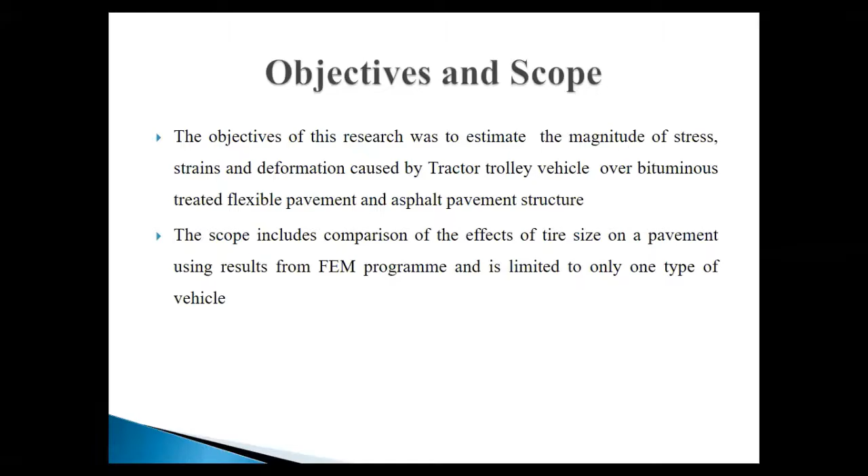For example, I'm moving on to the next slide. This is an introduction, you are looking at this as introduction. For example, I want to come back on it - where do I want to come back? I want to come back on the picture. I don't want to show you the slideshow right now. What do I want to show you here? I want to change it.

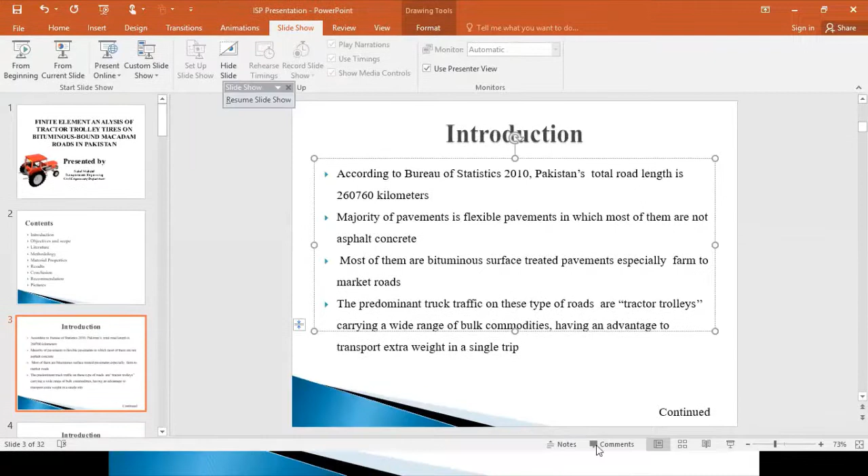I'll show you how you can make it in the paragraph form. For example, I am showing you here that this is in paragraph format, but it is not completely in paragraph form - these are in bullet format. You should not write any introduction in paragraph form, because people will get bored from your presentation. You should write down the important points in the form of bullets. You can see this blue triangle - these are known as bullets.

You should show all the points in bullet format, not in paragraph format, especially the important points - not all the points of your introduction. You should write it down in this slide, otherwise people will get bored from your presentation. You don't want to make them bored, so you should make their interest more. How can you make their interest? By making it into the bullet form.

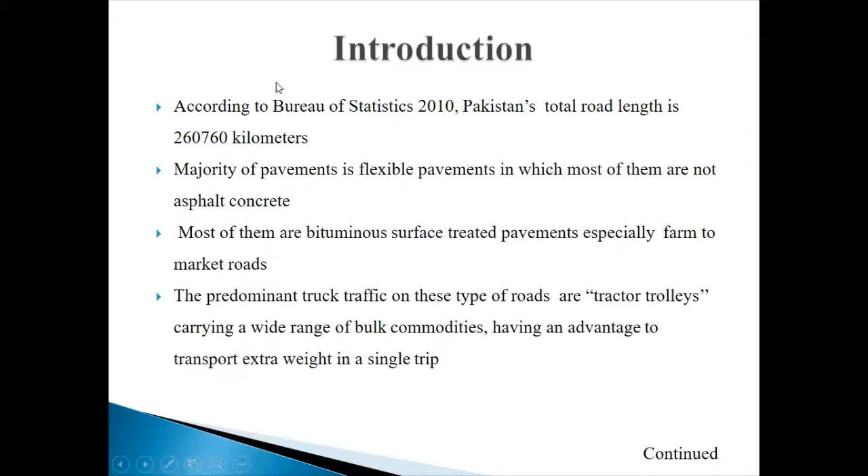You can make your introduction like that. For example, look here, there is an introduction given to you, and I want to make it evenly distributed. It is not evenly distributed, so how can I make it evenly distributed? I have to go into the Home tab, and I will make it evenly distributed.

Always keep it in mind, when you are writing an introduction, you should not write it in paragraph format, because it will make the audience bored and they will not take interest in listening to you. You should write particular important points which are relevant to your introduction and very important to discuss in the presentation. Write down only the main important points, and then you can describe those points clearly when you are speaking.

Keep it in mind, you should not write down anything in paragraph form. You should write in tabular form, in bullet form, so it will take the audience's interest. We have already discussed table of contents, and now I am on the introduction side. So what you have to do is write it down in bullet form.

How can you change the type or design of your bullet? You can go here in the Home tab, and you are looking at this - this is the bullet format. You can take this bullet form, or this one, or this one, and look, it is changing.

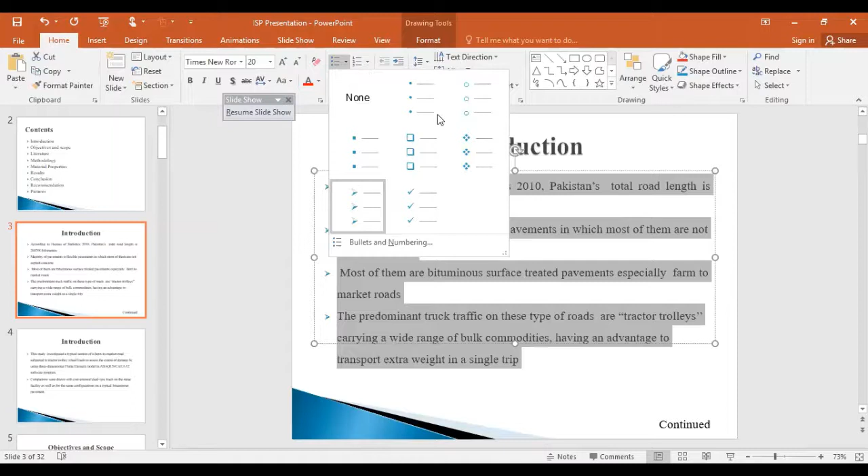You can also go for numbering as well, but I think numbering doesn't sound good, so we should go for bullets. How can you create the bullets? You should select this one - I think this will look far better than anything.

You can write down a full stop at the end of every point, so when you finish it, that's how you end it. What you have to do is select the whole points and make it evenly distributed - look, it will look nice. You can do it like this.

For example, I am moving towards another slide, and you can see the introduction is in points. So two bullets were left, so what I have to do is move on to the next slide.

But before moving to the next slide - we were on the same topic, that is introduction - what you have to do is write down 'continued' here, and you can also write down 'continued with the introduction' as well, or write down 'continued' on the next slide.

This will help the audience understand that you are continuing your previous slide. So what you have to do is write down the introduction here again, and you can write down 'continued' here. If you don't want to write 'continue with the introduction', you should just write down 'continue' here.

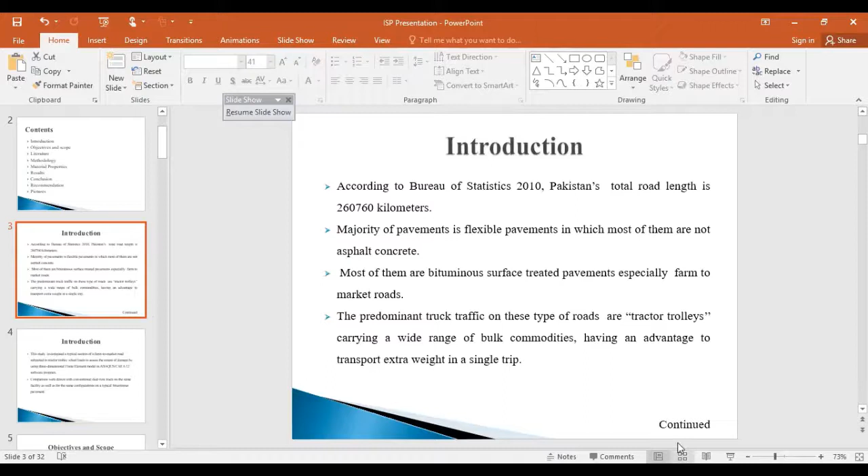So what you have to do is move on to the next slide. I am watching and I notice that the paragraph or bullet points are not evenly distributed, so distribute your text evenly between the margins. You have to do it like this.

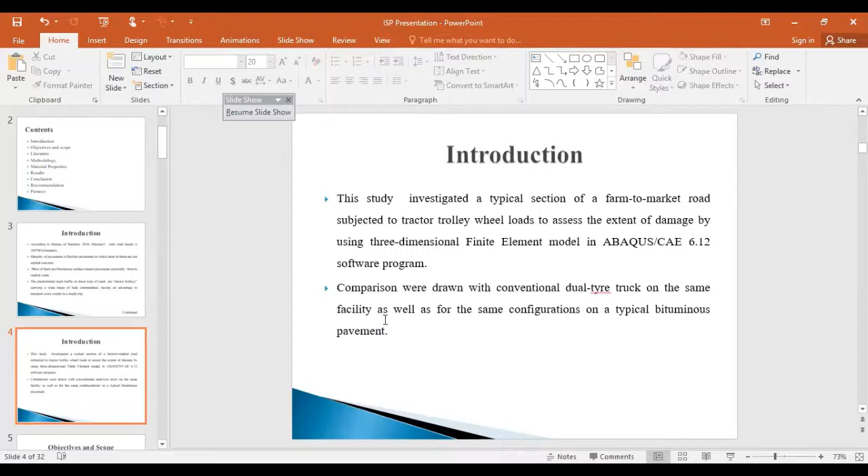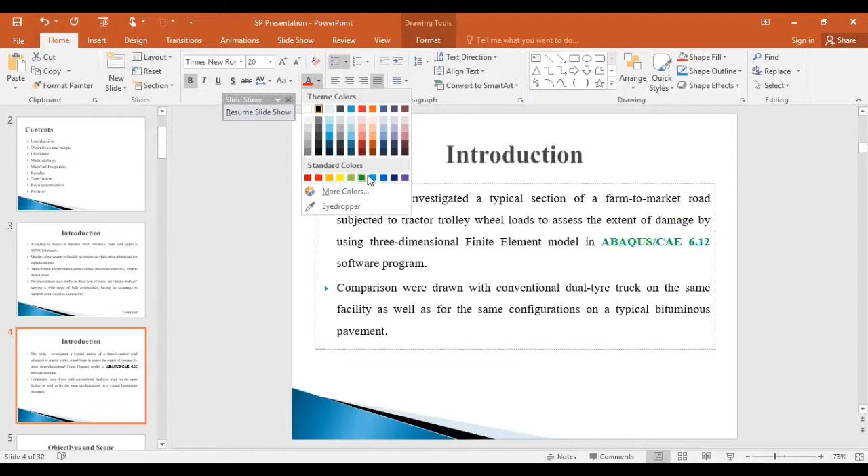I've used software here, so I've written down the name of the software, and it is clearly visible to you. You can highlight it by making it bold, and you can apply different colors as well, so it gets more attractive to the audience and they take more interest in it. These are some tricks you can use to make your audience more interested in listening to you and watching your slides.

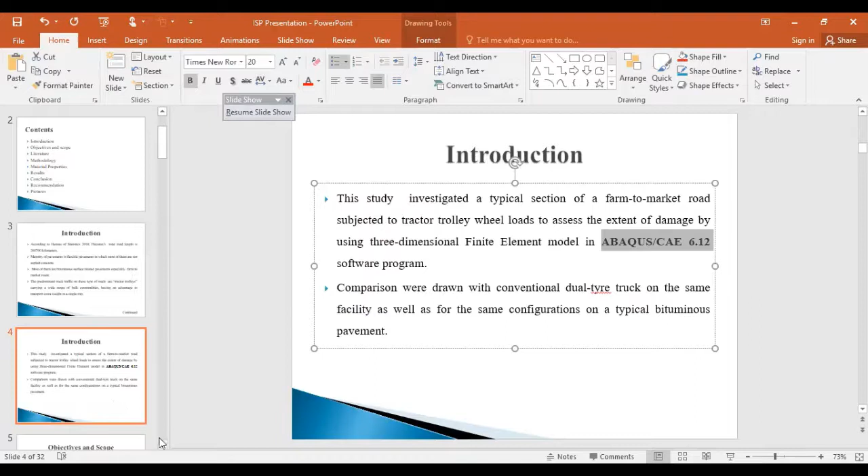For example, I am moving to the next slide, and there is a slide of objectives and scope. What I have to do is write 'Objectives and Scope' on the top of the slide, and then think about how I can show this in another way.

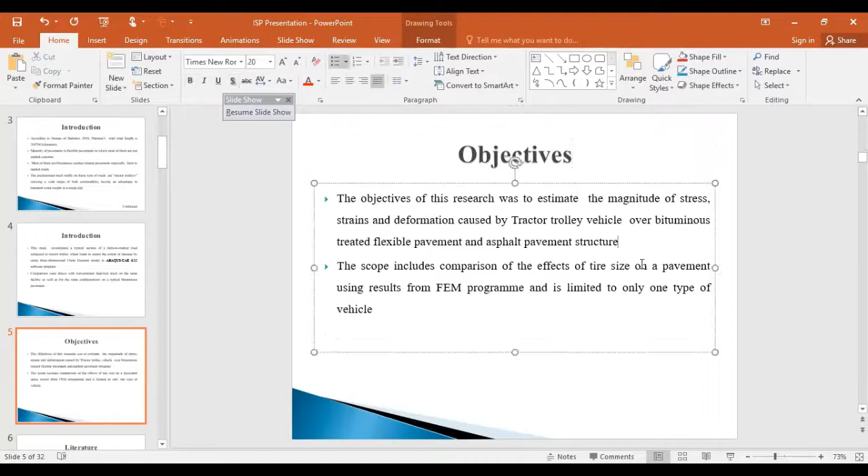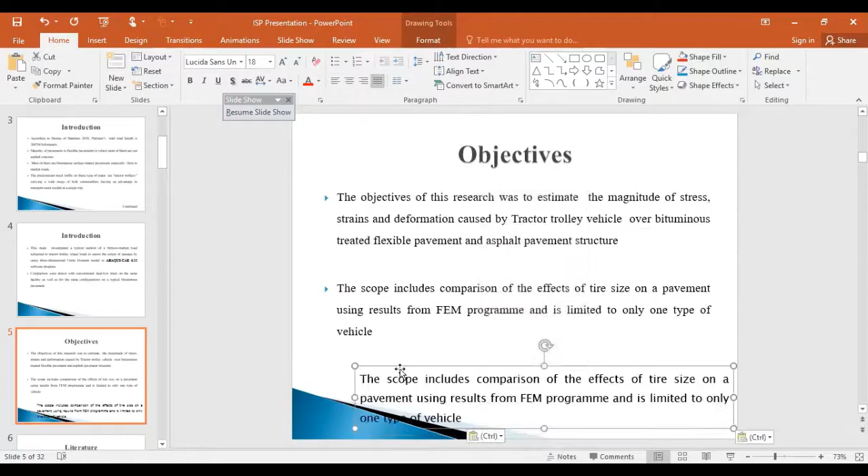So I have to drop here and write down, I have to insert text. I will insert text here. One more thing I have to do is copy this, and I want to add a text box here so I can divide both texts. I will paste it here, then delete this one, and go back.

So what I've done here is reduce its size and bring it here. I can write down the heading as well - 'Scope'. It's completely up to you.

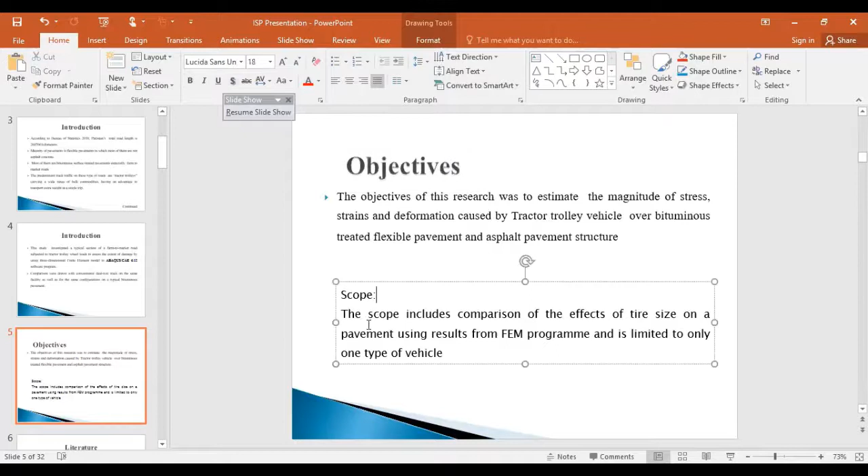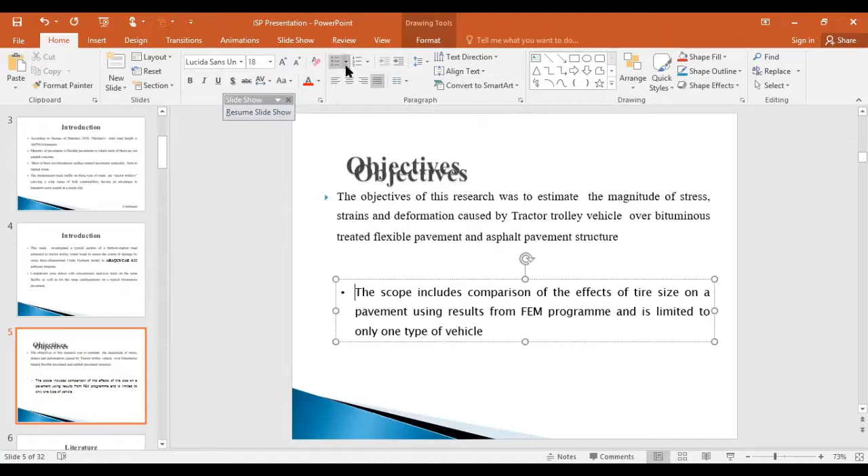What I am going to do here is put this 'Objective' here. Keep in mind, you have to take the same size for the objectives heading and the same size for the scope as well. One more thing you can do is copy this and paste it here, so you don't need to write 'Scope' again. If you want to add bullets and numbering here instead of this side, you can do it like this.

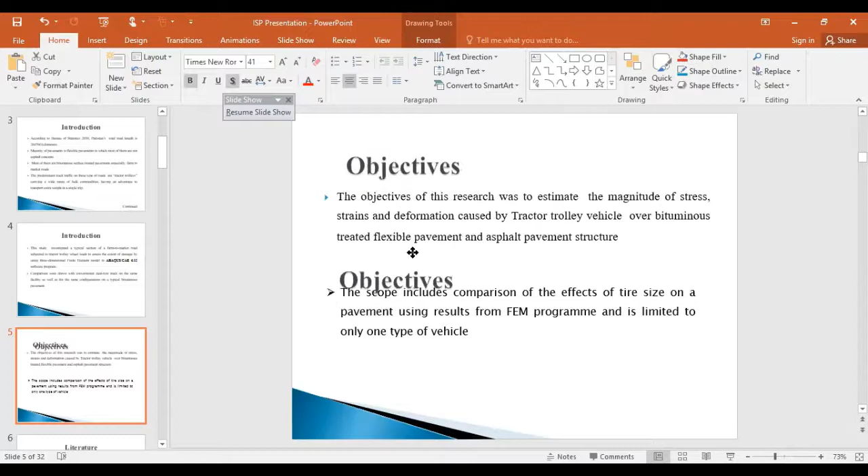I will bring this down, and this will be like this. So I will write down 'Scope' here. This will be helpful for you to understand how you can make your final year project presentation. This is the scope, and always keep in mind there is a small line of difference between the objectives and the scope, so always make it clear to everyone.

So what is the difference between the two? The objective is what you are going to do in that project or research, which you are going to share with the audience or present in front of the audience or the jury - meaning your teacher, supervisor, co-supervisor, head of department, final year project coordinator, whatever, and there may be some externals as well.

And what is the scope? It's the limitation - things you do not consider in the present research but want to consider in the next research. That is your scope.

For example, you have to discuss your particular scope, which includes comparison of the effects of tire size on a pavement using results from FEM (finite element modeling) program, and is limited to only one type of vehicle. We are discussing only one type of vehicle, not more than one, so that is your limitation. You have to describe your scope and objective in your research paper, and obviously present it in front of the jury as well. This is the way you can do it.

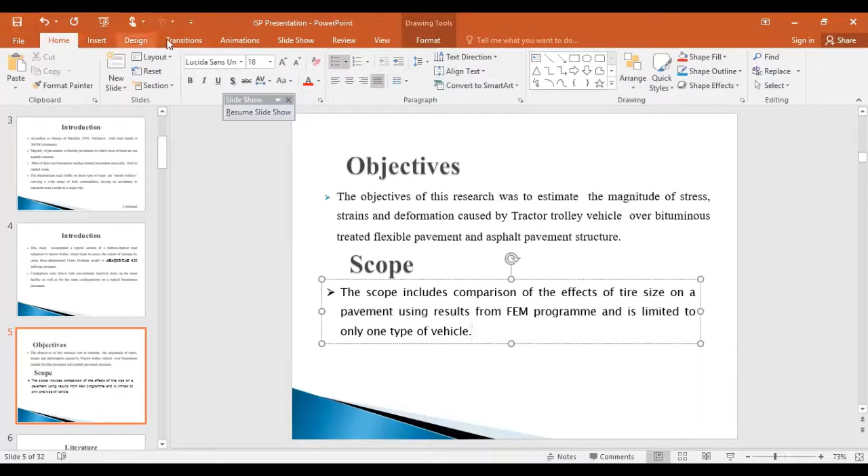Now I am moving back, where I want to reduce its size, and I'm going to the slideshow - this is the current slideshow. Let me share it again. So I am moving to the slideshow.

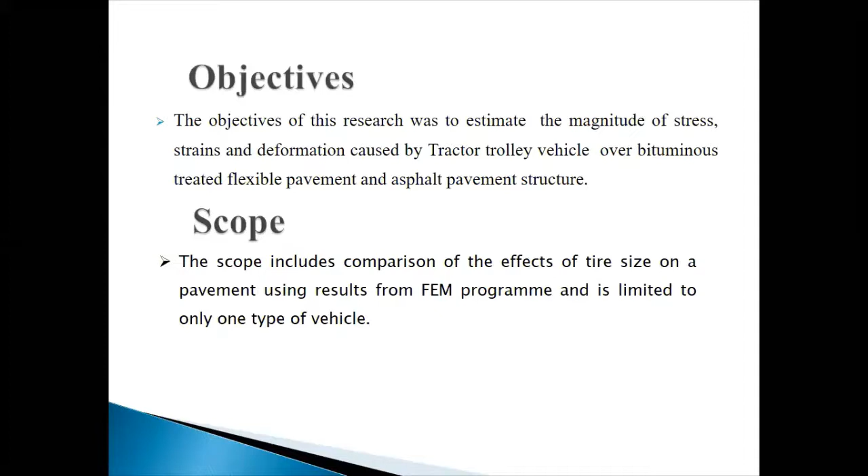Right now, what you have to do is write your introduction into points, into bullets. Then you have to divide - you have one slide for objectives and scope. Now, this is the literature work.

Look, there I have made a table here. How did I make the table? I read different research papers related to my own research, so I wrote the writer's name here. You can see Penn State, published in 1989, then Huhtala et al. 1992, FHWA 1993. So I wrote the writer's name, the research work, and you can also add the title here as well, and the year as well.

I have shown the comparison here, the wide-base tire they have taken, and how much damage potential occurred in their research paper. They have tested and taken different tests and research there. So what are the final answers I am going to show? I have to present this in tabular form.

In that way you do not lose the attention of your audience, so you should not write in paragraph form there. For example, if you read one research paper and then write the conclusion or recommendation part of the whole paper, that's not the way. What you have to do is write it down in a single line, or in bullet form, but not in paragraph form.

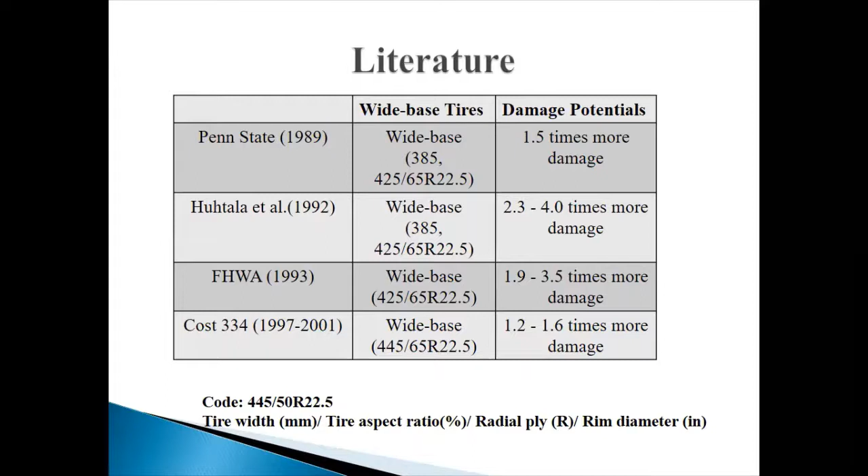I am moving to the next slide, and this is the methodology. It's up to you - if you have done this research work on the software, or if you have done all the work in the lab, whatever you have done in the laboratory, you have to write it down in points format, bullet format. You have to chalk down what you have done first, then second, then third, then fourth.

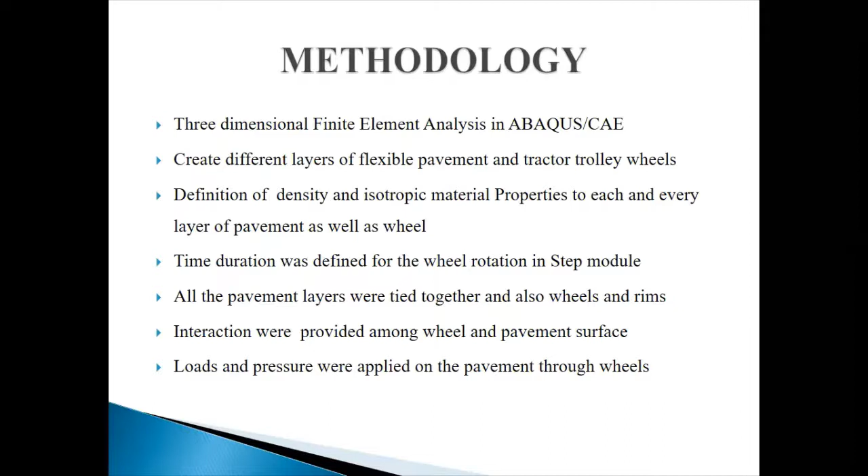You have to write it down line wise. When you are going to describe it, you can describe it more, but you should write down the methodology step wise. You have to go stepwise and properly chalk down what you have done in your research paper or research work. You should write the methodology in bullet format.

For example, it is continued on the next slide. You can write 'continued' at the end of this first slide, and you can also write 'continued with the methodology' as well, which I have told you earlier.

For example, I'm moving to the next - what are the material properties? While I was doing this research, I put it into tabular form. Whatever values you have taken, you can write it down and show it in tabular form. It will look good and nice, and it will help the audience understand easily.

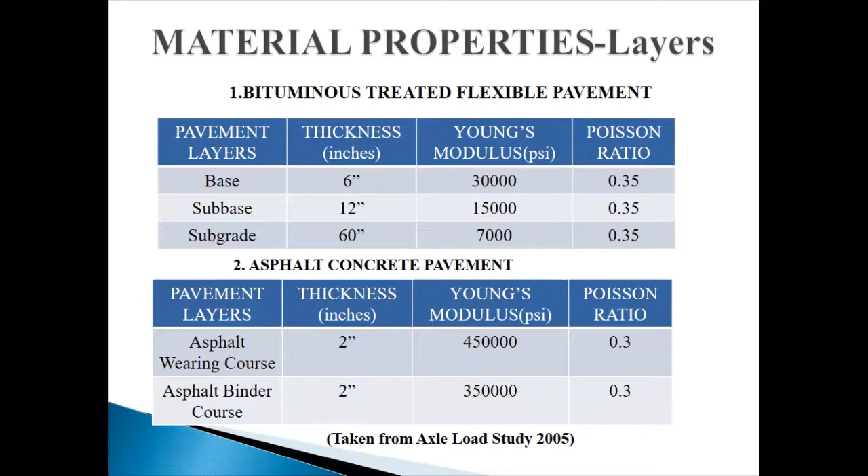You should be very careful that the audience sitting in front of you doesn't know anything. You should describe each and everything to them, be very precise, and whatever you discuss should be understandable to the audience. So whenever you describe your material properties, it should be in tabular form, which will help the audience understand.

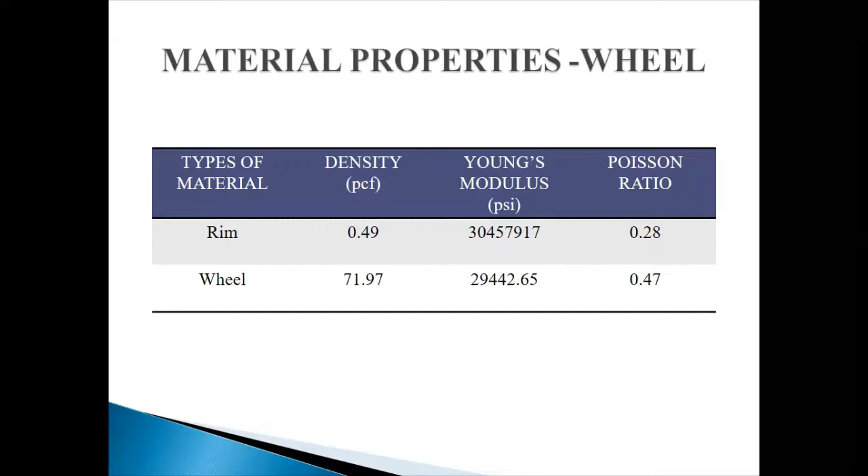For example, now I'm moving to the next slide. What type of material I have taken, and what were the density, Young's modulus, and Poisson ratio of that material, I have shown in tabular form. This is also the tractor tire configuration, so I put it into tabular form. It was not in tabular form anywhere, so I made it myself.

So now this is the model on Abaqus. For example, if you are doing testing and you have done lab testing, you should tell them what you have done in the testing, what methods you followed. You should tell them this.

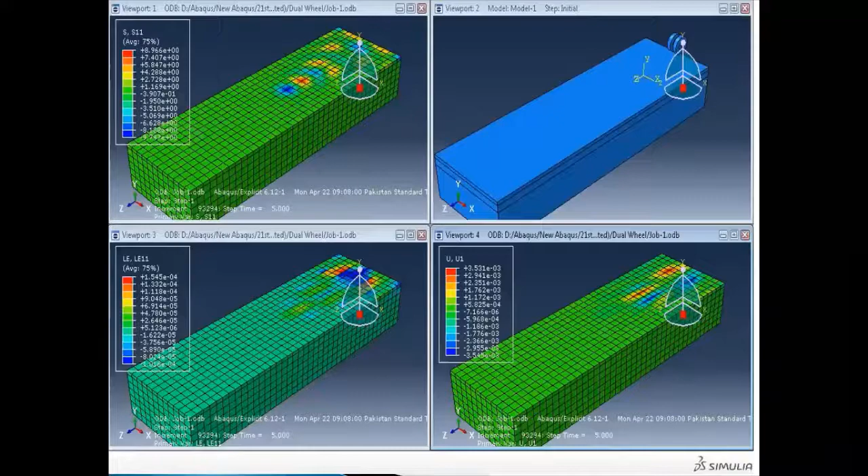For example, I have shown here different pictures of the models I have done. Nowadays students are doing this kind of presentation; I did this back in 2013. You can see this tire moving on this pavement road, so I did this simulation.

There was also a video showing this tire moving on the road, and you can see the stresses and strains in the boxes. These boxes show how much stress and strain occurred while this tractor trolley tire was moving on the road, showing the stress and strain created on the pavement structure.

So what you have to do is display different pictures, and you can also show the video of that simulation. This will attract your audience as well, and they will appreciate it.

In this picture, you can see different tires moving - tractor trolley tires moving on the pavement structures - and you can see the strain being created on the pavement structure. You can show this in video form too, because most software shows different videos and structure simulations.

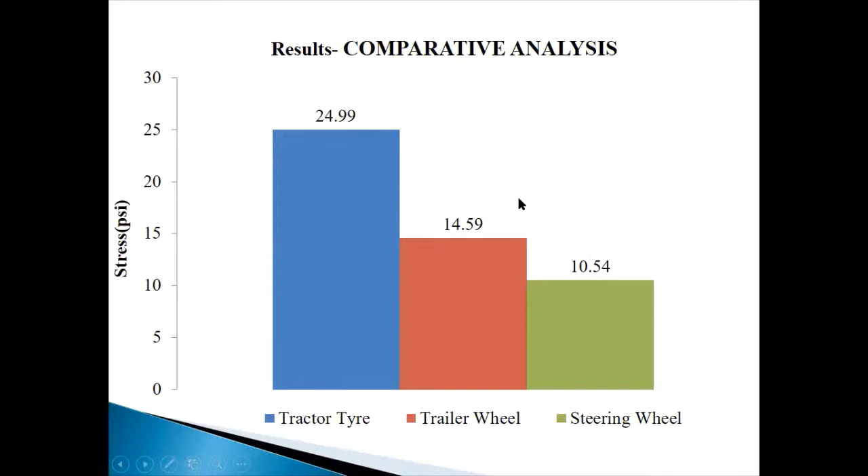You can easily see how much different stress was created on the pavement structure when the tractor tire, trailer wheel, and steering wheel were moving. These stresses were created, and you can easily find out which had the highest stress generated - these are the comparative analysis graphs made on MS Excel, clearly visible to the audience.

I did not show this as a paragraph or in tabular form, because graphs are more attractive and show more comparison. They are more visible to the audience and will attract them as well.

So you should describe your results, comparative analysis, or graphs in the presentation and discuss them. You don't need to tell them the values you got - you have to show it in the graph. Now I'm moving to the next slide.

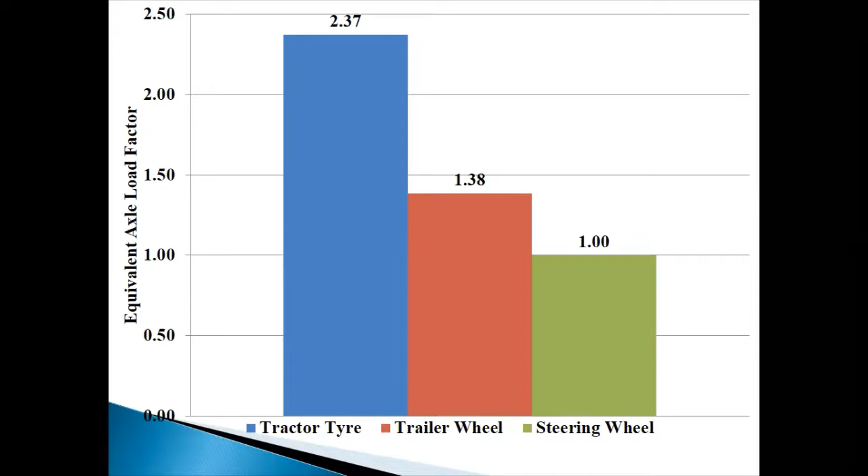For the conclusion, I wrote it in bullets and points, which makes it easier for the audience and jury to understand. They will clearly see what conclusion you have drawn from your research.

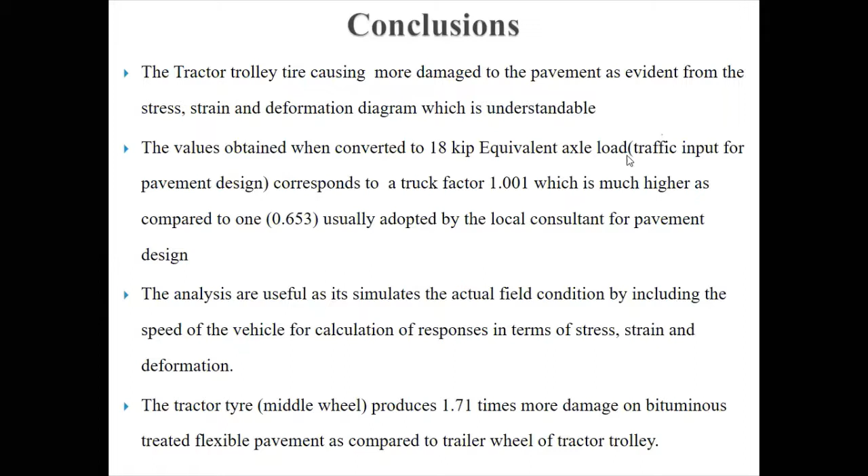You can show your conclusion from this slide. Keep in mind it should not be in paragraph format, it should be in points. You can also show your conclusion, if you are getting your values, in tabular form as well. So it's up to you, how you want to attract your audience.

For example, moving to the next slide, there is the recommendation. You know very well what the recommendations are when you have done your research. You want to tell the audience what you are going to recommend to others after doing this research, because you are not very experienced, but you are suggesting.

You suggest that after doing this research, this has to be done, but you have to suggest it, not recommend, because you are not at that stage, not very well experienced, that you can recommend this has to be done, because every research has some pros and cons, and some values left behind.

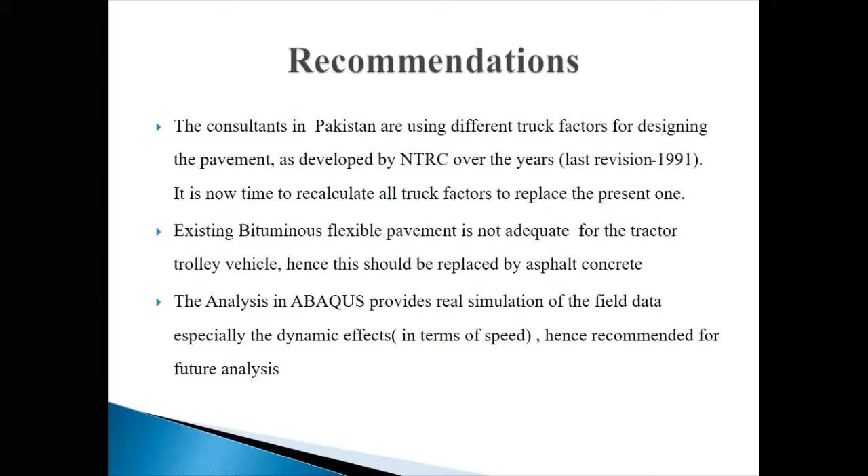So what you have to do is suggest this has to be done. You are at the stage of suggestion, not recommendation. In recommendation, we mostly suggest to our consultants. For example, if you are a civil engineer, you have to suggest to builders, consultants, civil consultants, contractors what they have to do after doing this research.

Why have I done this? Because tractor trolley tires are used in Pakistan, and what impacts they are creating, what stresses and strains they are creating on our roads, because our roads are not designed for tractor trolley wide base tires. That's why we have discussed this, we have done this research paper.

Because they are not there at the time of the test, how can you prove it? You can prove it by showing your pictures of testing. At the time of testing, you were there, how did you test it? So you can also show a video of 2-3 minutes while you were doing the tests. These are the ways you can show it.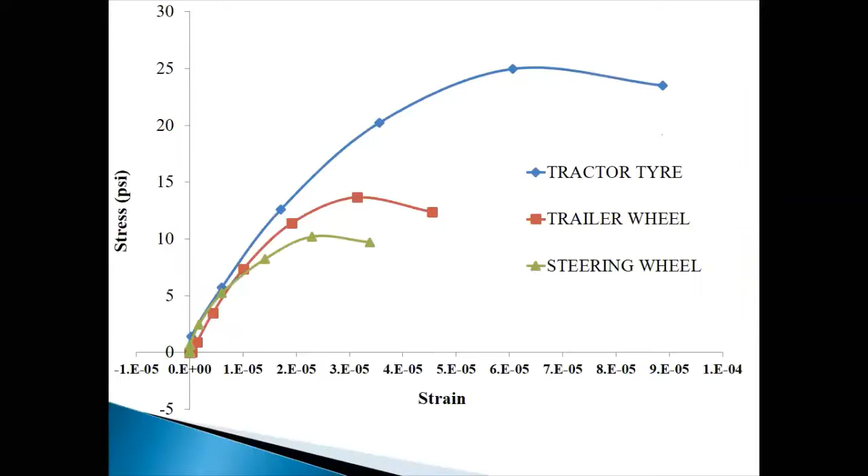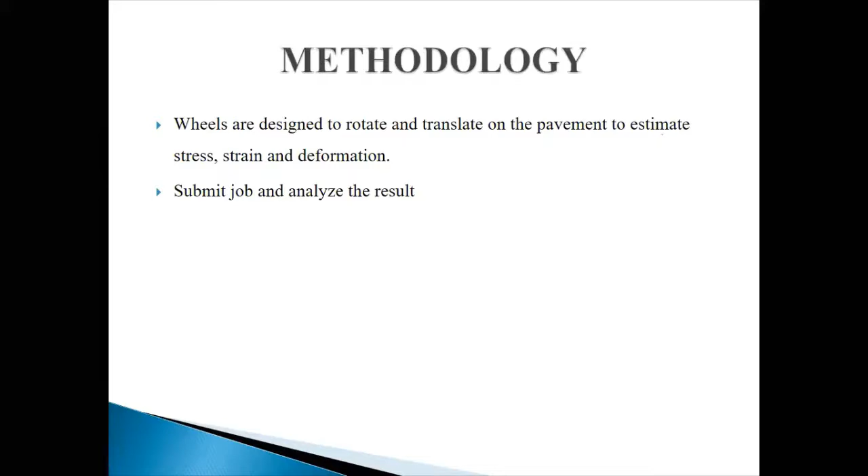For example, in methodology, you can see there is a huge space for me, so I can add different pictures here. I will put a picture on this methodology, for example any picture related to my methodology, related to my test. You can put different pictures as well, and it's up to you whatever design, slide, and animation you want to use in your presentation. This will make it more attractive and help you attain marks in your final year project.

I think maybe I am able to tell you how to make your presentation. Hopefully you will be able to make your presentation more attractive after watching this video, and it will help you make your presentation step by step related to your research work, because this is the era of research work. You have to understand how to make your research more attractive, and how you can get your research work more attention from the audience. So these are some ways and tricks to make your presentation more attractive. That's all for today.